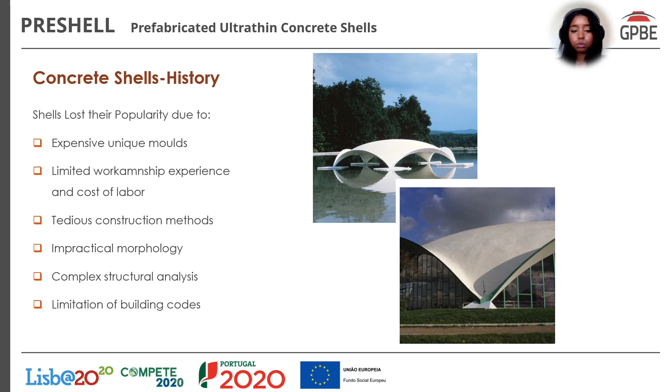However, recently the shell industry has witnessed a rebirth, because many of these obstacles now have some solutions developed. To state a few: there are constantly new production and construction techniques developed, many advances in computational capacities, a better understanding of construction materials, and better and wider access to testing techniques, adding to that the environmentally aware design ideas of today.

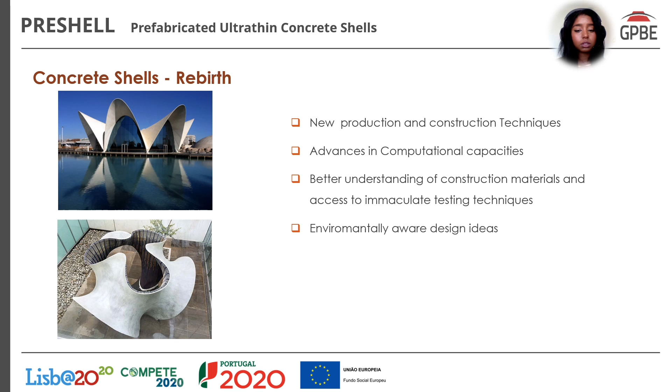A quick outline for the project: we have the shape finding process to start with, the material characterization, the tessellation methods, the connection development, the reinforcing system, the structural design, construction planning, and of course leading to the end, the prototype production.

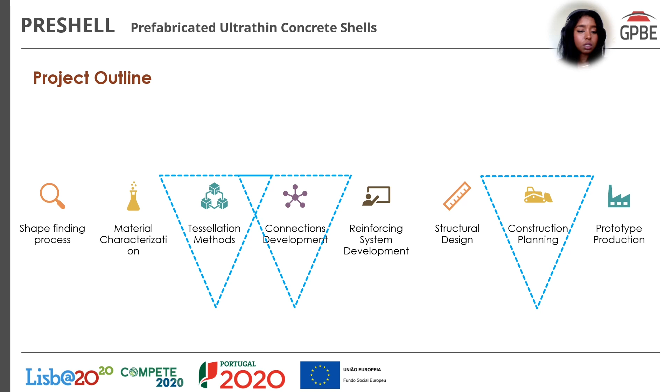In IPL, our tasks were focused around the tessellation method, the connection development, and the construction planning. To start with the shell tessellation and the connection development - the tessellation of the shell was a very important aspect leading to the development of the connection, given that it's very important to know how the shell is going to be divided, into how many sub-elements, to decide which development, which system of connections we are going to use.

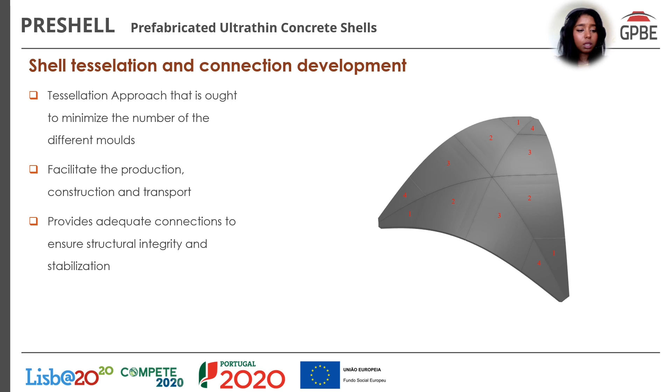The tessellation is very important in deciding how to minimize the number of different molds used and to develop reusable molds, which is, as stated before, one of the most important aspects of the project - to reduce the cost, to reduce the production time, to facilitate the transport and the de-assembly in the future if desired, and of course to provide structural integrity and stabilization to the project.

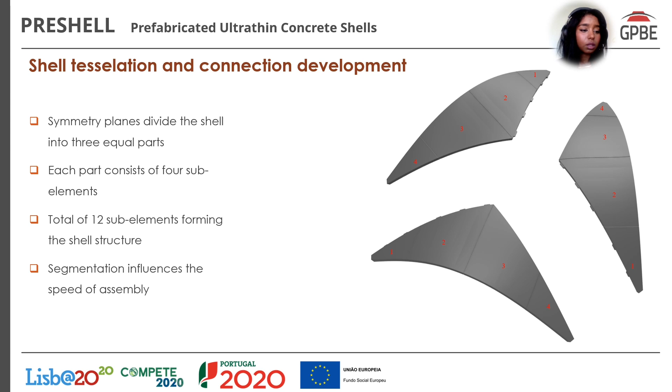As we can see here, and as stated before, the shell is divided by its symmetry planes into 3 main sub-elements. To develop the connections, we have divided these 3 sub-elements each into 4 small sub-elements, which translates later to 4 molds that are going to be used for production. This gives a total of 12 sub-elements forming the entire shell of the structure.

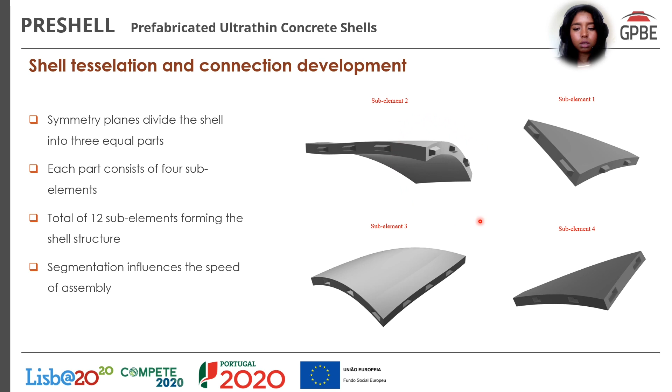As we can see here, a photo of the 4 sub-elements and how the connections are developed within these sub-elements. We have an indentation, a male connection, and a female connection.

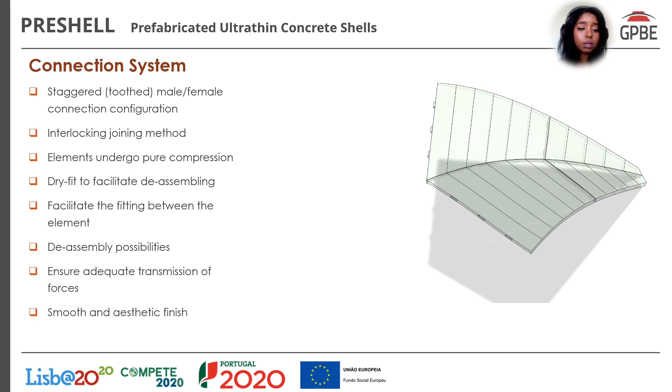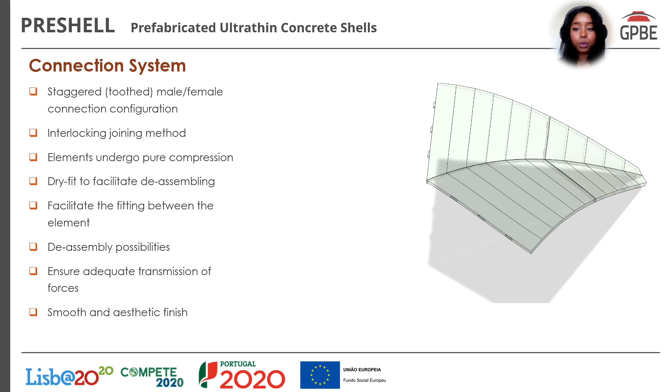This is a small preview to show how the connection system is developed and how the sub-elements are linked together. It's a staggered tooth male-female connection using an interlocking joining method to make sure the elements undergo pure compression. It's a dry connection, and the dry fit is set to facilitate the assembly process, as well as the deassembling process if desired in the future, as well as facilitating the fitting between the elements, and ensuring adequate transmission of forces, with the added advantage of having a smooth and aesthetic finish.

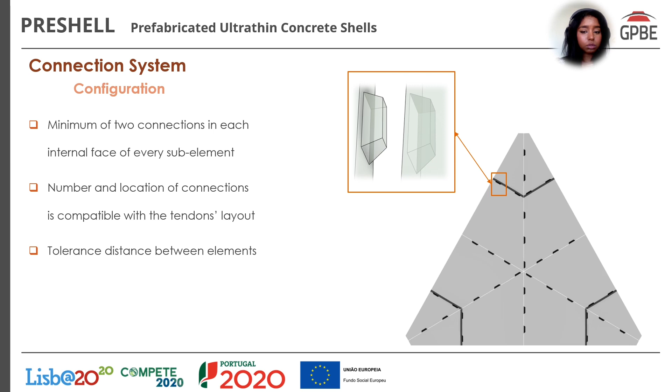The shell is going to be reinforced with internal monostrand pre-stress. Therefore, it was very important while developing the connections to keep this in mind, to make sure the connections don't interfere with the pre-stress layout. This can be seen here in these illustrations, that the spacing between the connections was developed keeping in mind the pre-stress layout.

In the project, 2 prototypes have been developed: the main prototype and a reduced scale model, which was set originally for the purpose of testing on a seismic shaking table, in addition to direct quasi-static tests. Therefore, the connections were developed for both of these prototypes, the reduced one and the full one, with the same geometry and the same concept, but with different dimensions.

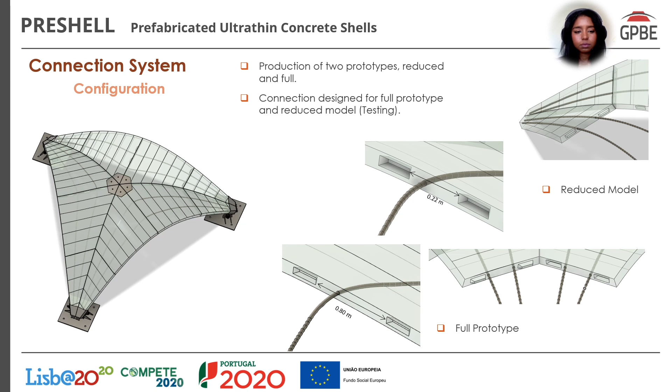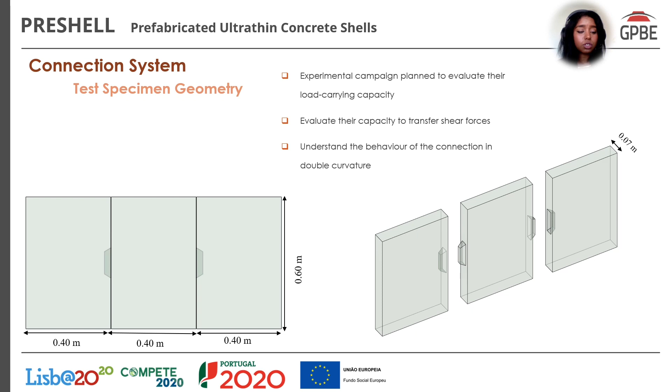Now, to test the connections, we have developed a simplified small model to test the connections individually. This is the model, a simple 60 by 40 with a 7cm thickness, which is the thickness of the reduced model prototype. An experimental campaign was planned to evaluate the load carrying capacity of these connections and to evaluate their capacity to transfer the shear force and to better understand their behavior within the shell. This is a small illustration for the dimension and location of the connections. In this test specimen, the depth of the indentation was about 3 centimeters.

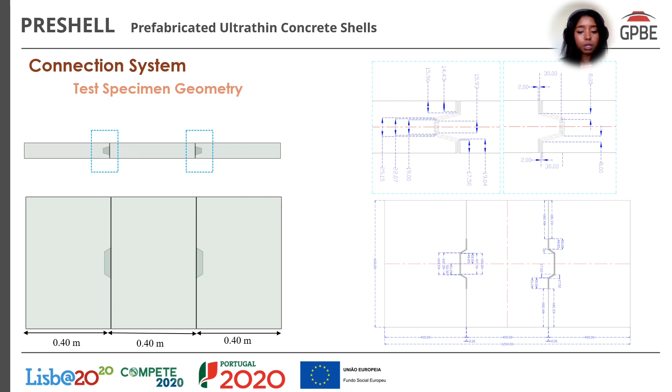To start with the experimental campaign, we have planned 2 types of tests: an in-plane shear test and an out-of-plane shear test. To start with the in-plane shear test, as we can see here to our right, there is a model of the test prototype, the planned test prototype.

The 3 concrete specimens were fixed. The 2 side specimens were fixed to the frame using steel elements to prevent any undesired movement during the test. Meanwhile, a force was applied to the middle element through a hydraulic actuator. In addition to an external pre-stressing, the internal pre-stressing in the shell was modeled in the test in a form of external pre-stress using threaded bars to make sure that the connection face is constantly under compression.

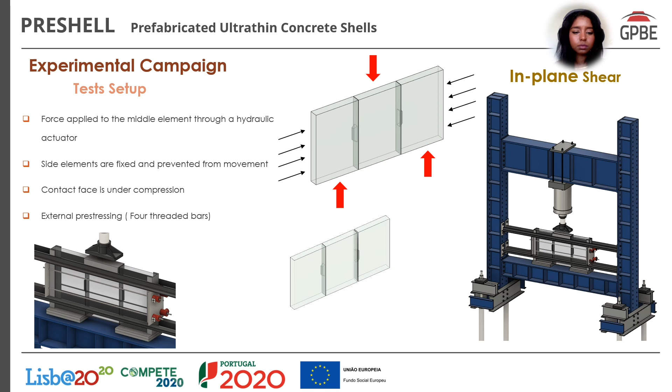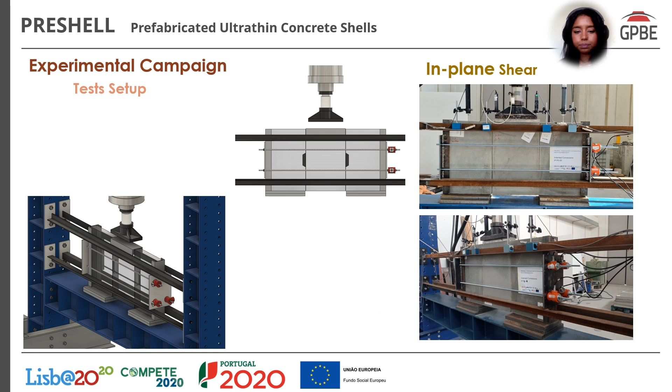Now, to explain a little bit more about the tests, the test was a displacement control test. We used 4 LVDTs, 2 LVDTs in the middle piece and 1 in each of the side specimens. The pre-stress was applied using, as mentioned before, 12 millimeter threaded bars, 4 bars, 2 on each side, and the pre-stress was applied using a cell.

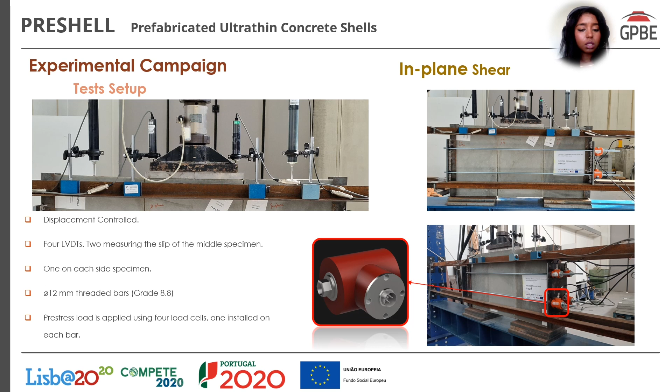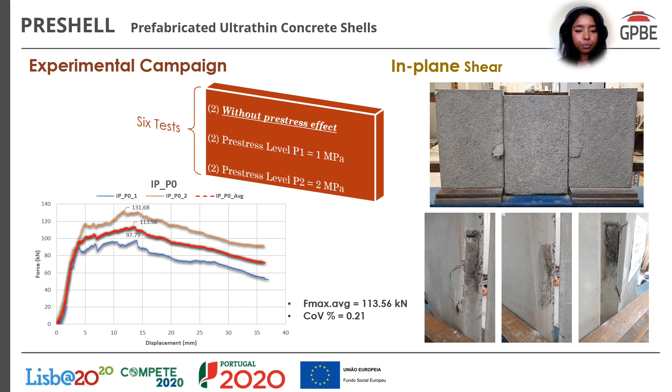Moving to the second pre-stress level, which is 1 megapascal applied to the connection face, we can see more or less similar behavior, with an additional effect of friction around the connections resulting from the added level of pre-stress, with a maximum load carrying capacity of 143, which is roughly 25% additional load carrying capacity than the test without pre-stress.

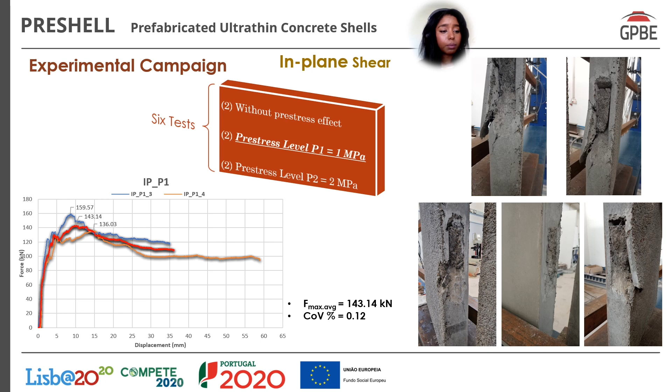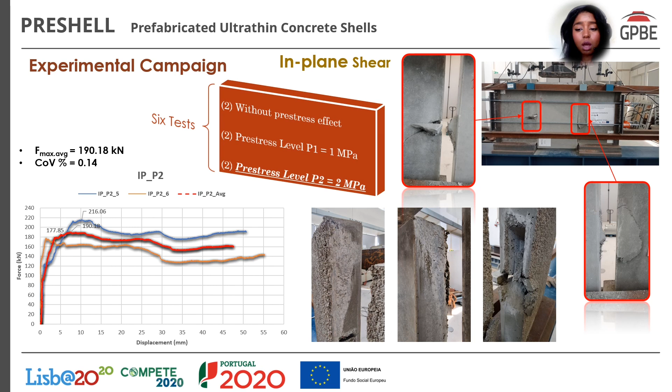Now, to summarize the 6 tests, to our left we can see the graph of the 6 tests. The green color is the test without pre-stress, the brown is the first level of pre-stress, and finally the blue is the 2 megapascal pre-stress. We can see here the typical failure of the pieces, and the position of the failure with respect to the pre-stressing part.

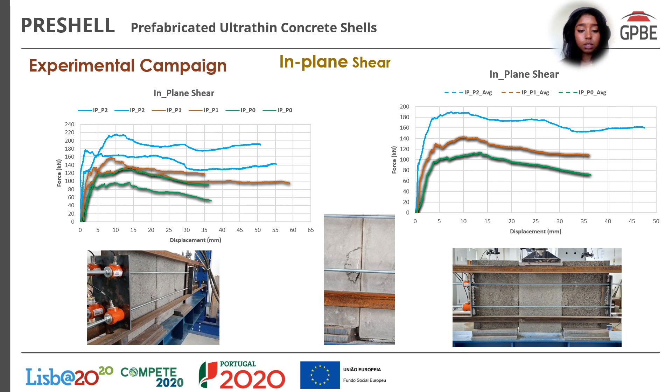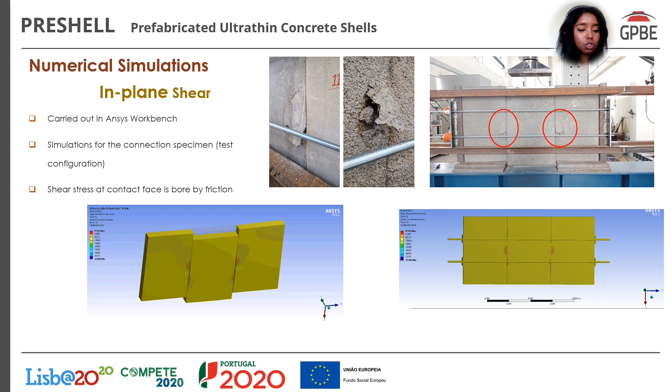Now, some numerical analysis were carried out mainly for the purpose of validation and comparison with the experimental results, to understand how the connection is behaving and expected to behave under the applied loads. We can see here at the bottom an illustration of the normal stresses. The numerical model was able to predict very well the behavior of the connection.

Here we have the normal stresses to the left and the shear stresses to the right. If you look at the area of the connection, the behavior is quite similar to the experimental test.